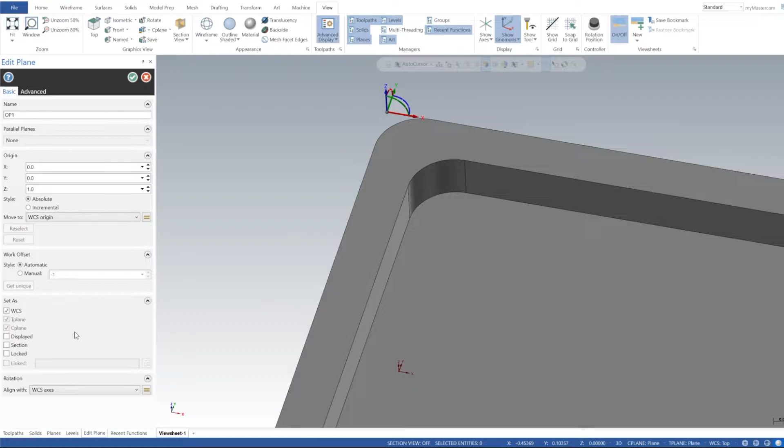I'm going to click OK on that. Actually, let's name it something. I'm going to name this... sorry, I went into Fusion for a second. So this is going to be called Op1. And then I'm also going to turn on work coordinate system in the set as, and then work offset, I'm going to put number 1, and then go ahead and click OK on that.

And then I'm going to right click on the screen, go to isometric, and click fit. And then on our view sheet, I'm going to save this view sheet. Okay, cool. So now let's set up a work coordinate system for the bottom of this part.

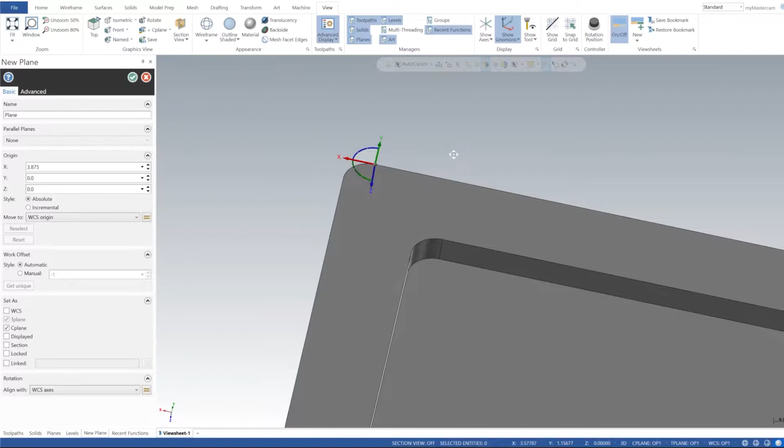So if I flip it over, try to get a good angle here. So that's our op1. Let's pick this corner for our operation 2. I'm going to click dynamic on our planes, then select the same area here, and you'll notice our Z is pointed in the wrong direction. So if you select the inner thingy, you could rotate this over 180.

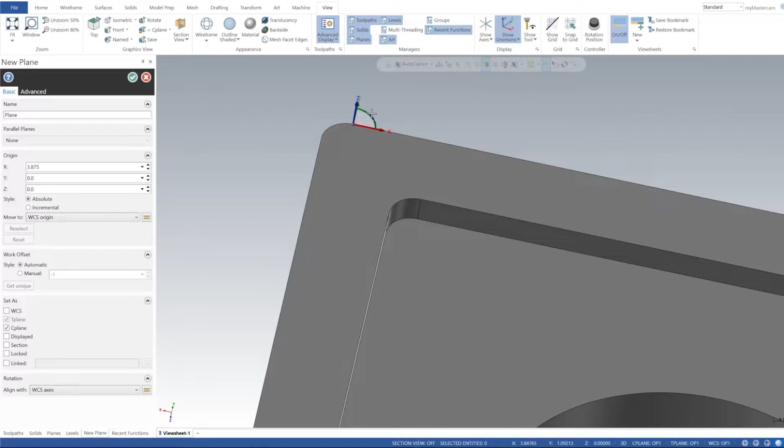Quick tip here: inside this ring, it'll snap in 5-degree increments, and outside the ring, you're free to set the angle that you like. But I'm going to go ahead and set that to 180. And then I'm also going to set the X to this line right here.

Okay, cool. And I'm going to name this Op2, and set that as a work coordinate system. Click OK, then select isometric. Then I'm going to click the plus sign next to our view sheet, right click, view sheet 2, there we go. Save view sheet as bookmark. Another thing is edit, and I'm going to set manual, and set that to work offset number 2.

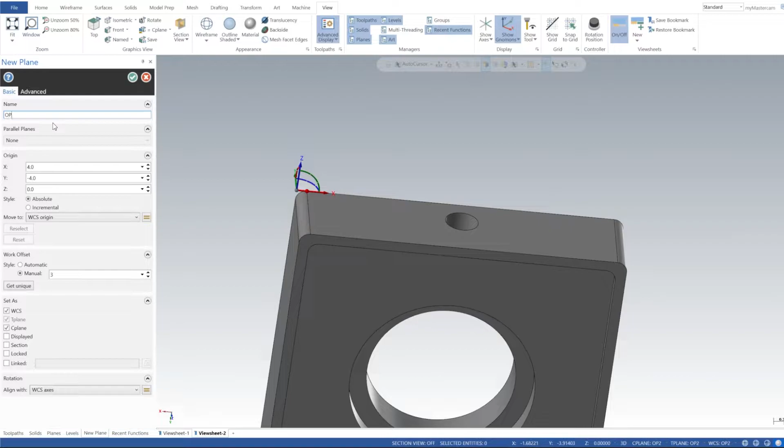Okay, cool. And then the last work coordinate system we need to set up is for the side of the part here. Same thing, plus sign, dynamic. I'm going to snap to this edge here, and then drag the X over. I'm going to set that to number 3 before I forget, and call this Op3. And I'm going to select OK.

And then I'm also just going to right click isometric, click the plus here, and save view sheet. We can rename these as well, just right click and rename. So put op1, rename, op2, rename, op3.

Alright, cool. So now if I click op1, we're in this display here. And you could also notice that it sets your... sorry, I have the auto hide feature on the taskbar. So our C plane is op1, T plane is op1, and our work coordinate system is op1. And if you go to the op2 view sheet, it switches it all over to construction plane 2, tool plane operation 2, and work coordinate system 2, and then it'll also do the same for 3.

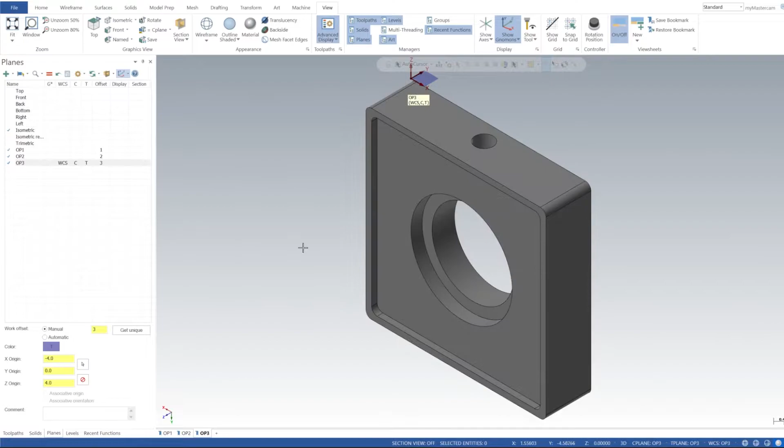So that's a good way of easing your flow when you're programming this part all the way through, because then if I just click this one, we could just program off of all this, right? So let's go to machine, let's go to mill. I'm going to do a default mill. And then let's go to our tool paths.

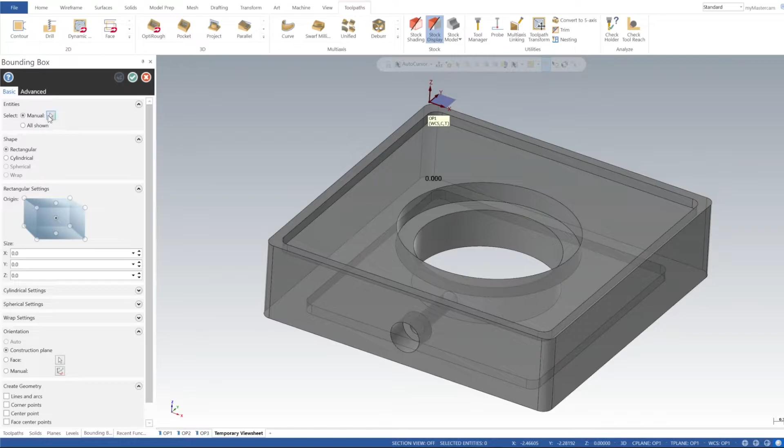So now I'm going to set up our stock. I'm going to select add bounding box, then select the cursor next to manual, select our solid model, and select OK. And we have our auto-generated stock.

Then in our toolpath group, I'm just going to double click this and put op1. And we can go ahead and collapse that.

So in operation 1, we're going to do a face mill, and then we're going to have a 1/2-inch cutter do our contour, our pocket, and also our bores. Then we need to clean up this pocket with a 1/4-inch end mill to get the radiuses, and we'll also put a deburring tool.

So we can go ahead and go to our tool manager and set that all up. If we right click, we can create a tool. I want to start with the facing mill. I'm going to put 1.9 by 2, and then I'm also going to put a corner radius of a 1/16.

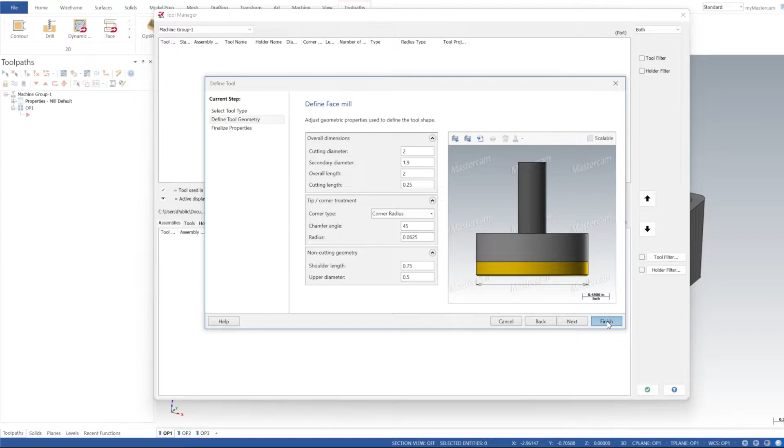That's fine. Let's go back into that and edit the tool. If we go into finalize properties, we could have it just do our feeds and speeds for us, so we don't have to adjust it in the actual toolpath when we grab the tool. It'll just always be that.

We'll just put 6 flute face mill or something. For the feed rate, let's go ahead and put 60, and then our spindle speed we'll just move this at 4 grand. We'll just go ahead and leave all the labels the same here. And I'll click finish on that.

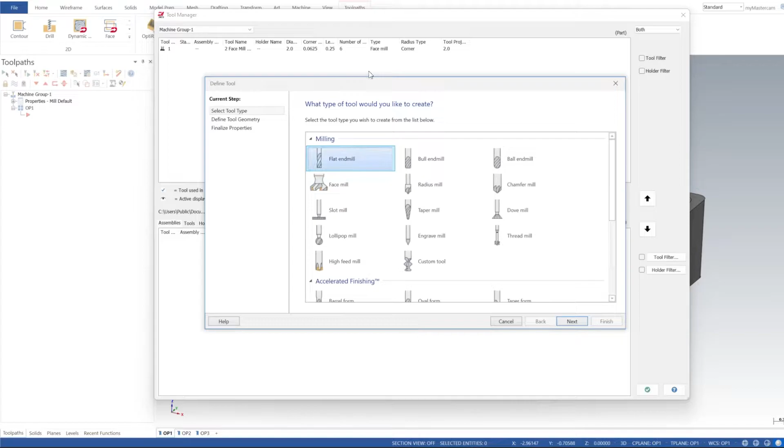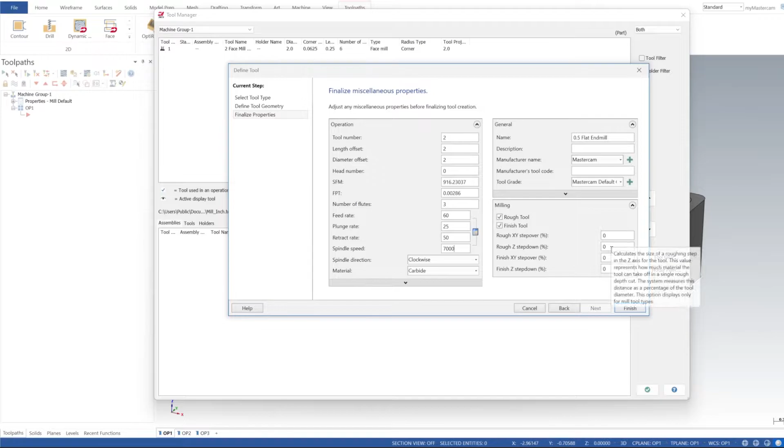Right click, let's create another tool. We'll do our 1/2-inch end mill, and we'll say it's a 3 fluter. For our feed rate, I'm just going to put 60 and 7 grand. You could also populate these fields too, but we'll go ahead and just do those in the toolpath.

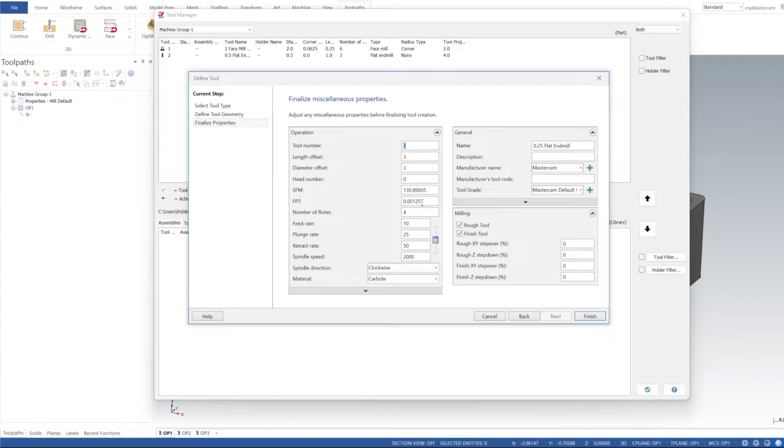Right click, we're going to create a tool. We're going to create our 1/4-inch end mill now. We'll just type in 250, finalize properties, and we could enter what we want. We'll spin this at 10 grand and we'll go 40 on the feed. And that'll also be a 3 fluter. Click finish, and then create tool.

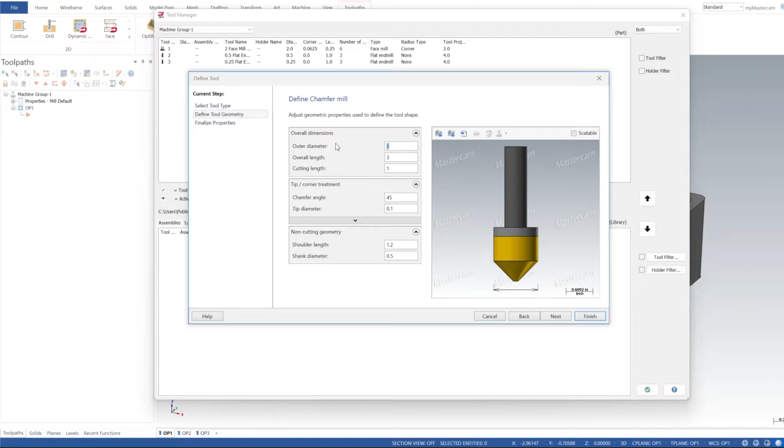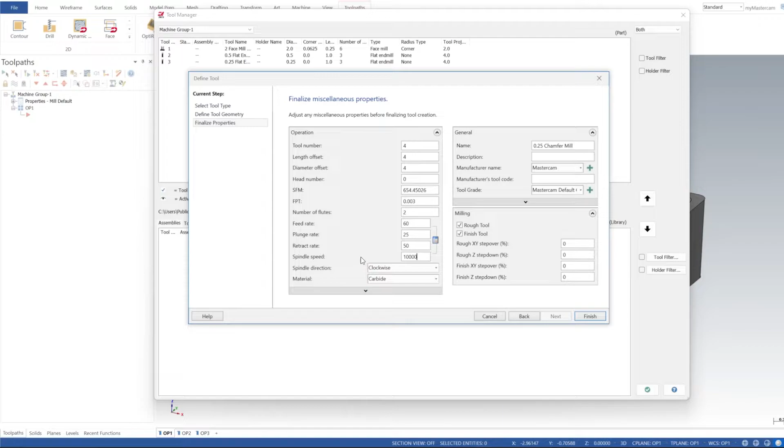And we're going to create a chamfer mill. We'll just say we have a 1/4-inch chamfer mill. Our diameter, oops, not 25 inches, 0.250 inches. And we'll say our tip is 30 thou. Finalize properties, and we'll just say this is a 2 flute chamfer mill, and we'll go ahead and put in our feed rate. We'll just do 60 at 10 grand. And we'll click finish on that.

And then the other features on the side, we have a 201 drill, number 7 drill, and we're gonna do a tapping cycle on that as well. So we'll go ahead and create those tools.

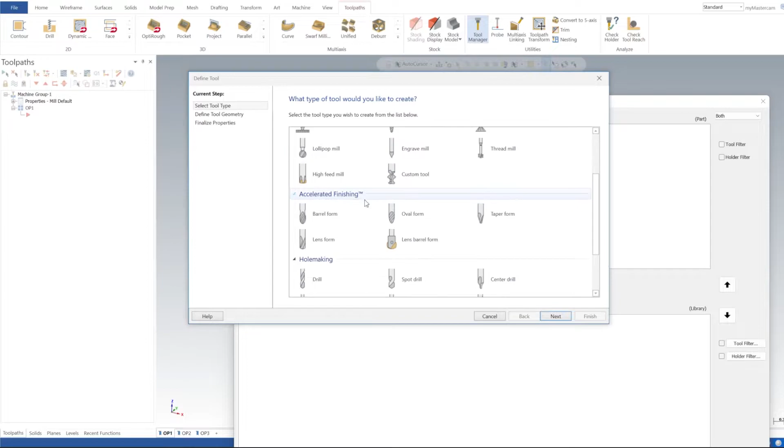So let's go ahead and drill. We're gonna set this as 0.201, and finalize properties. We'll just do some conservative numbers here. We'll do a feed rate of 20 and spindle speed of 2 grand. So I'll click finish on that and then create tool.

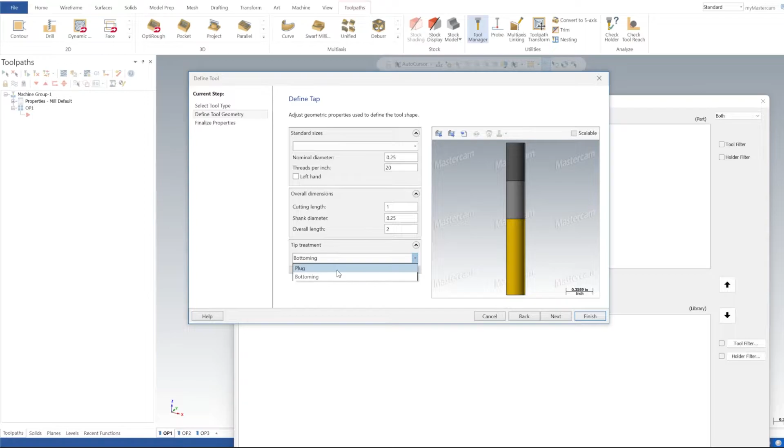And we're gonna create our tap. So I think the standard tap it gives you is a quarter 20. So our nominal diameter is 250, threads per inch is 20, and I'm going to set that as a plug tap. 1,000 by 50 feed rate is fine for this. Let's see, the pitch is 50 thou, so feed per tooth is 50 thou. Perfect.

And tap cycle, we'll just set that to rigid tapping.

So now we have a tool library for this, and you could actually save these and bring them up for different parts that you're going to program. So say you have a tool list and it's already in the machine, you could just call this back up and just keep reusing these tools. So we have our tool manager set, and I'm going to go ahead and close that.

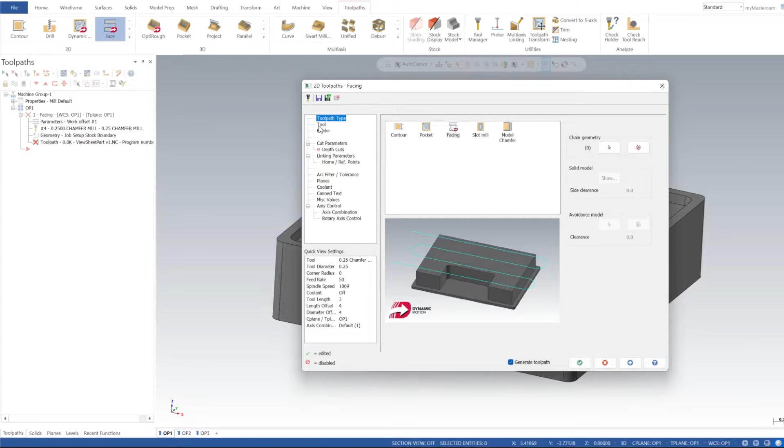So let's do a face. I'm not going to select anything, we're going to go off the stock. And then so this is going to be tool 1, and then you can see it auto-populated our feed and spindle speed. Linking parameters.

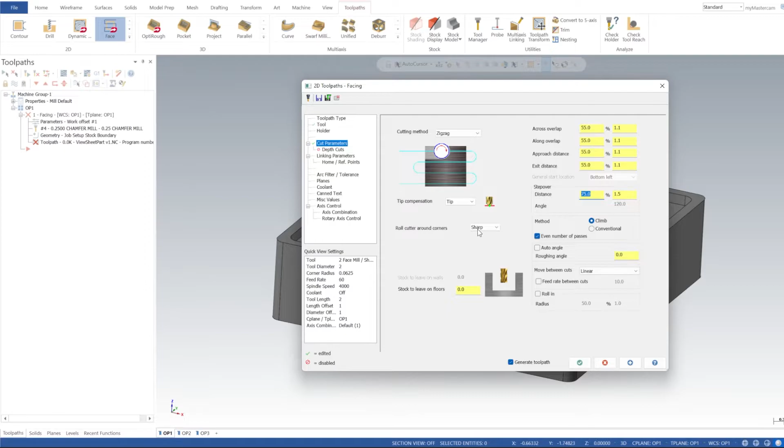Well, let's go to cut parameters. I want that to be zigzag, and I don't want any stock left on the floor. I'm just going to set all these to 55%. And then step over 75% is fine. Shouldn't be taking too much material off.

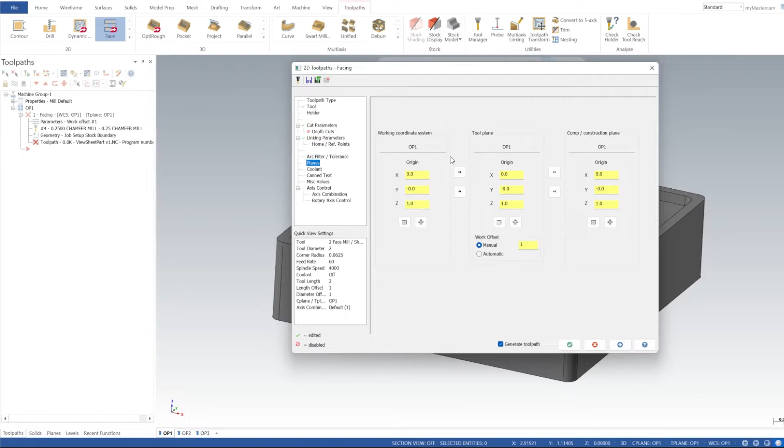I'm going to go back to linking parameters and set this all to absolute. For depth, just click the top. It should be 0, right? For planes, you can see it auto-populated our WCS, tool plane, and construction plane to op1, which is what we're working on. So I'll click apply and OK.

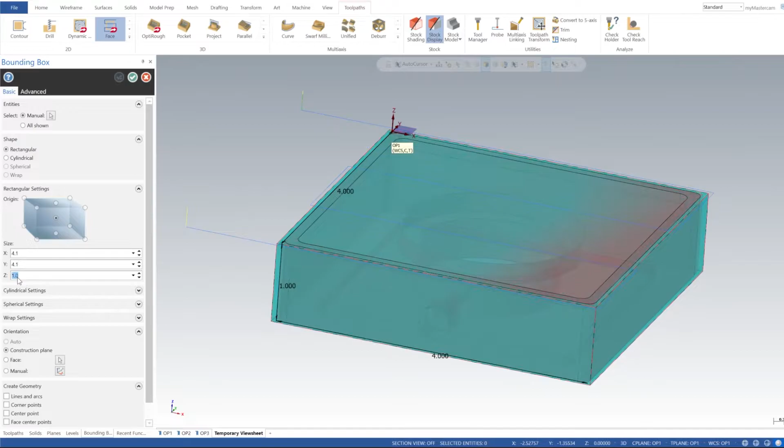And just for demonstration, I'm going to go back to the stock, and I'm just going to add 100 thou to our dimensions here so we could see it actually machine. Alright, and then I'll just click regenerate on that.

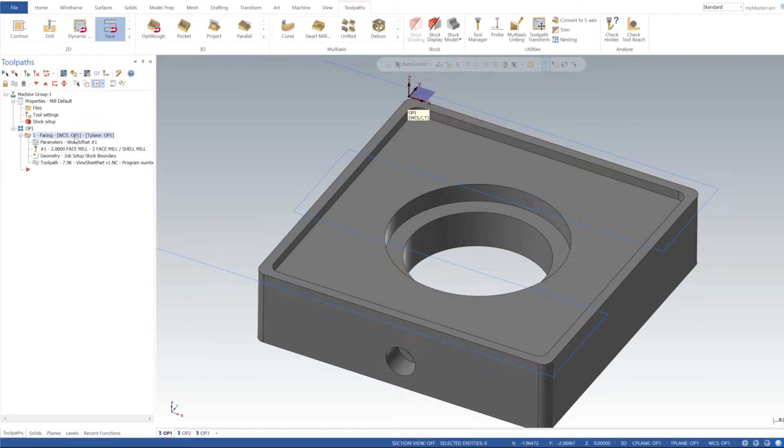Alright, cool. So next thing we're going to bring out is our 1/2 inch end mill, and just do a contour, then pocket and circle mill. So let's go ahead and do a contour.

I want to highlight that bottom contour there, just so it gets our depth. I'm going to click OK. Tool, it's going to be tool number 2. And see, it's pretty cool — it generated our feed and speed for us.

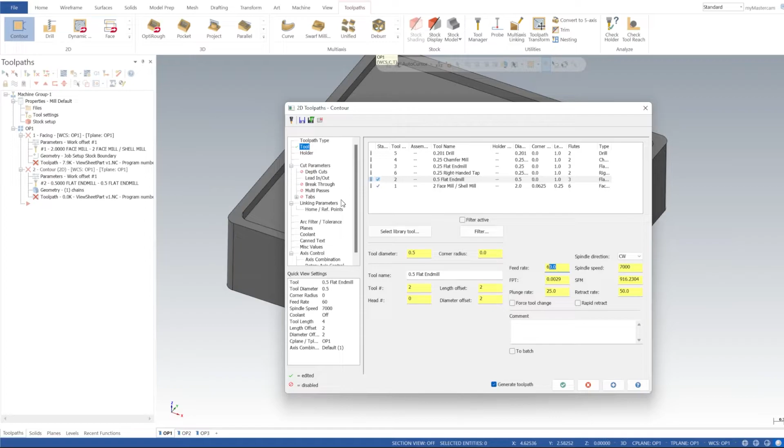Then cut parameters, I always like to use wear. Compensate to the left, sharp, yeah. And we don't need to edge break this because it already has radiuses on the geometry. Lead in, lead out, that's a bit extreme. I'll just go ahead and put 25%, 55%, 90-degree sweep, and put that to our exit as well.

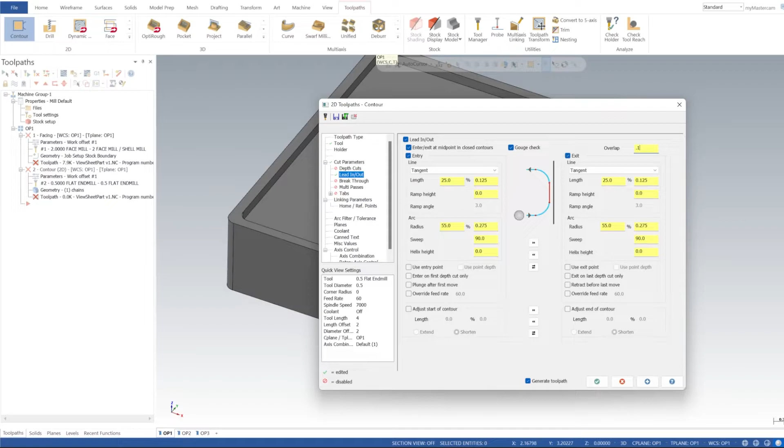And enter exit at midpoint in closed contours is good. We'll do 100 thou step over. And then for our linking parameters, I'm just going to set this all to absolute, and for depth it already picked up our -1 inch. So click apply, click OK. We can see we have our contour here.

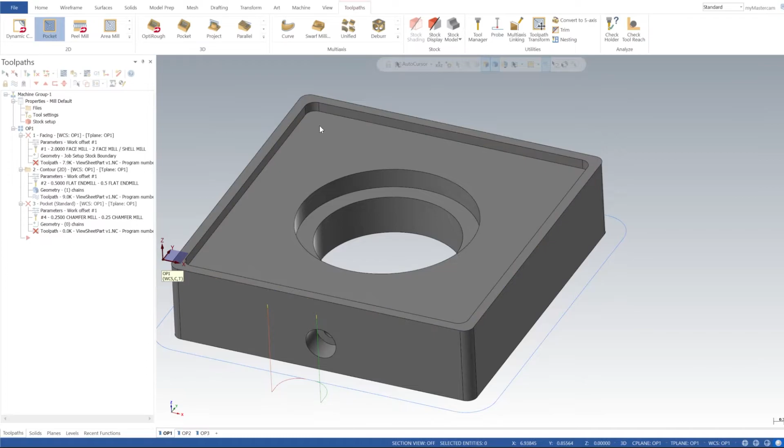And then we'll just go ahead and do a pocket tool path. We'll select the inside pocket here. I'm going to select OK. Tool, I'm going to go ahead and select our 1/2 inch end mill once again. We'll go right to cut parameters, and for the walls we'll go ahead and leave a little bit for our 1/4 inch to come in and clean up, since we got to hit those radiuses anyways.

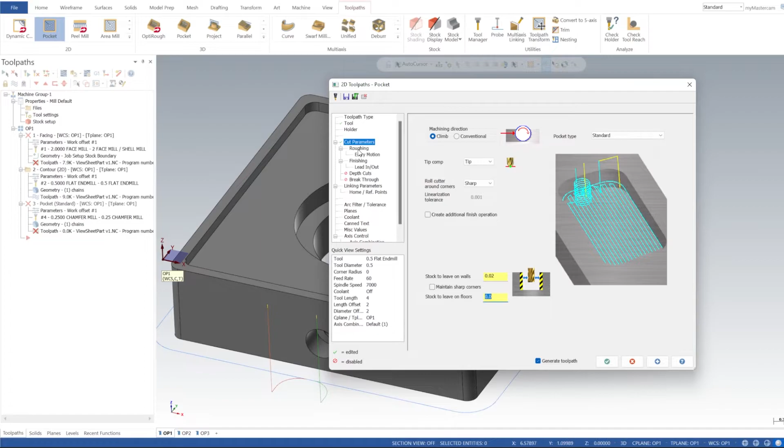And stock to leave on floor we'll leave at that 0. For roughing, we'll just go ahead and leave it at zigzag. 50% step over is fine. It's not that deep. We'll helix in, just let it do its standard helix in here. And then for our finish, we don't need a finish.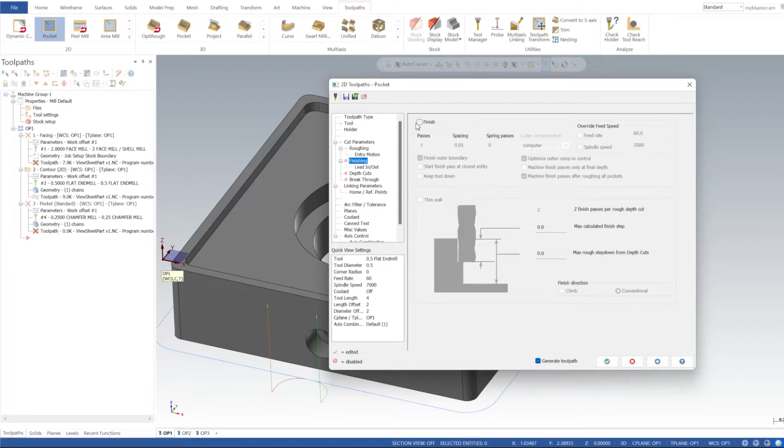We're going to finish up with our 1/4 inch, so lead in and lead out's also turned off. And then I'm just going to set all this to absolute. Depth is not -100, it is -1/8 of an inch. Click apply and click OK.

So we can see it's going to spiral over, spiral down, and then just zigzag back and forth in that pocket.

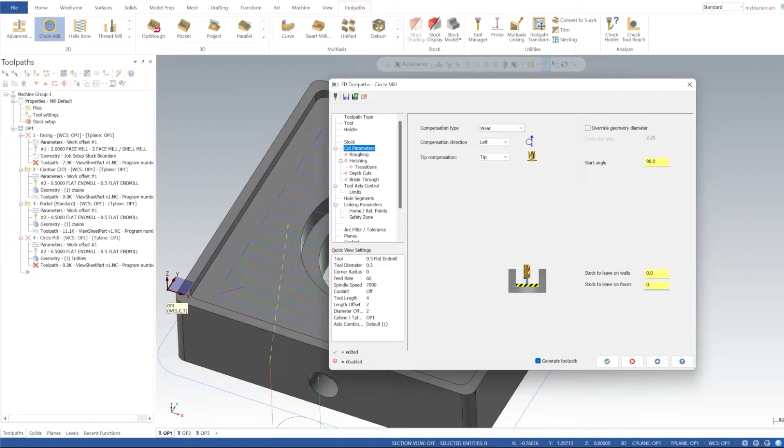And then the next thing we need to do is our circle mill. I'm going to do this big bore first. Tool, 1/2 inch. Cutting parameters, we're going to turn on wear, and 0 to leave on walls and floor. And then for roughing, we're going to turn that on. We'll leave a 50% step over, and then helix entry we'll just leave it at the standard values.

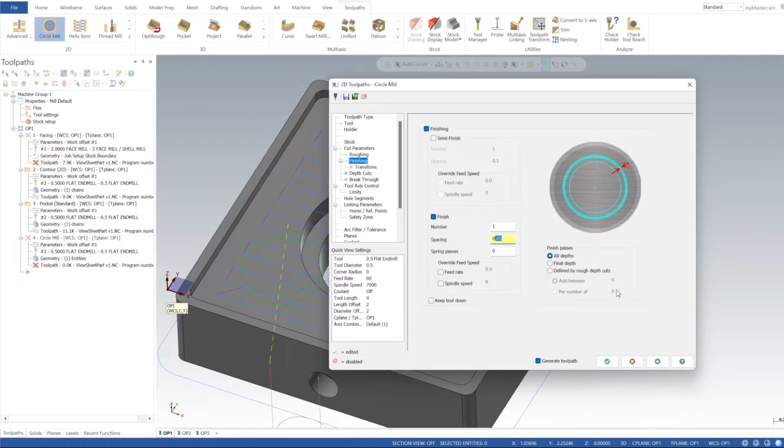And then we're going to turn on our finishing. We want 1 finish pass, and spacing of 50 thou is fine. And we'll just do our finish pass at the final depth.

And linking, I'm going to set all these to absolute. And then for our depth, I'm going to select the bottom of our bore there, which is 3/8. So let's go ahead and click OK on that.

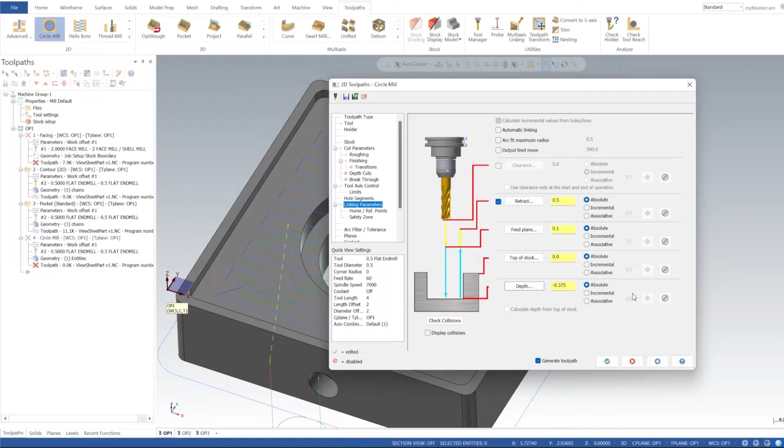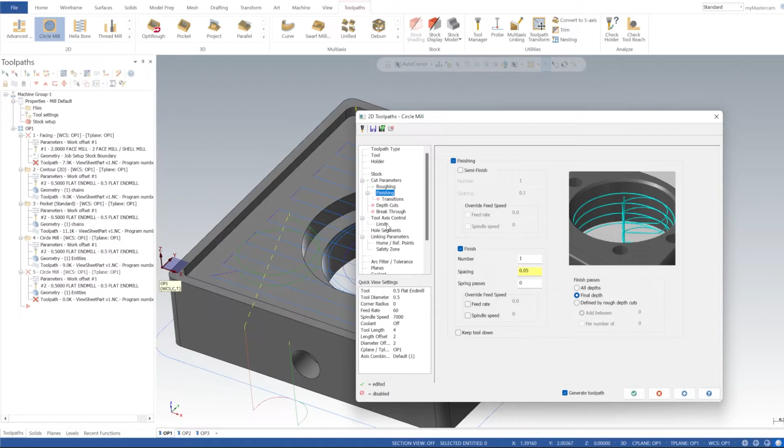So we can see we got most of this programmed already. And then I'm also going to circle mill once again the inside bore. So let's go ahead and go in there, select our 1/2 inch tool, cut parameters, wear should be the same, and then all of our values should be the same from the last time we did this, but it's always good to check.

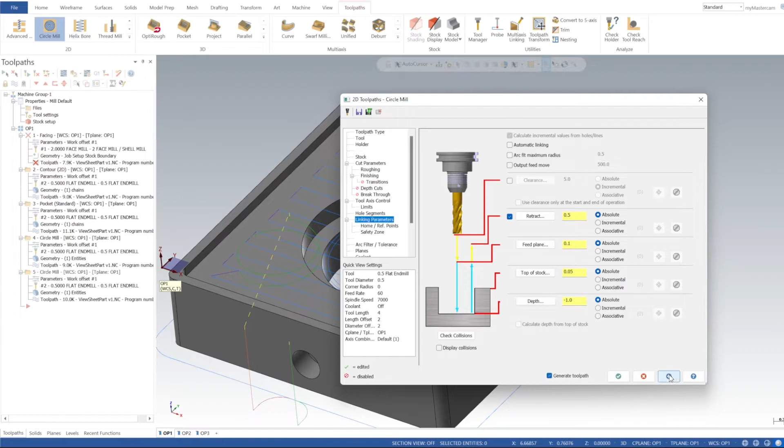And we'll just go ahead and go down 1 inch, just so it's going to show up on the back side, and we don't have to worry about any material being left over and milling over like 10 thou of material. It's pretty noisy, so we'll just make sure it kind of breaks through that. So I'm going to click OK on that and click apply, and we'll just generate that tool.

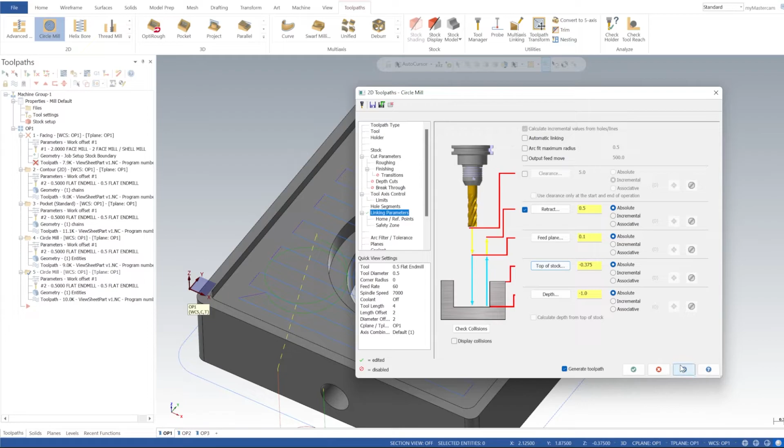One thing we need to do is select our top of stock, the floor of our wider diameter bore, just so it doesn't helix down so much. You could just get right into it.

Last thing we need to do is go back and do our contour, and I want it to go the other way. Our tool is going to be number 3, our 1/4 inch end mill.

These values should be fine, where all these values are good. Same lead in, lead out's fine. For linking parameters, top of stock is just going to be 0 there. Feed plane, we'll just set that to 100 thou. Select OK.

I really don't like where it started there, so I'm going to go to chain and edit this. I'm just going to select the dynamic feature and select the end, kind of in the middle of that geometry, and then regenerate that. Now we can see it's going to enter and exit in the center of this. Perfect, all right.

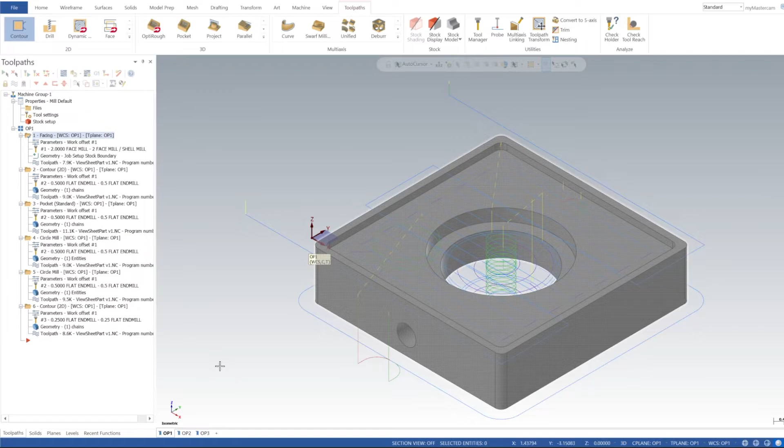Also, we need to regenerate our face mill there. So if I go to isometric again and right click fit, and go to op1 and say view sheet, and then hide all of these, it should come back with those on. No, maybe not. Maybe they changed that in 2023. I'm not sure, all right.

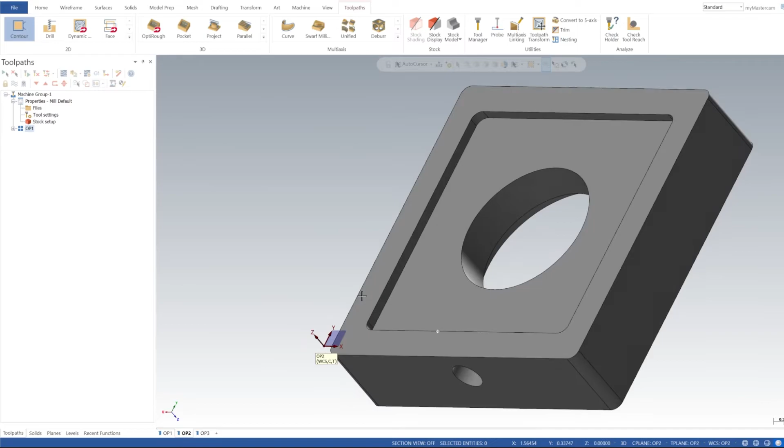So we have op1 programmed. Let's select our op2 view sheet. This actually is not a good location for our work coordinate system, so let's just go back into planes, right click edit, and I'm just going to take this and snap it up here.

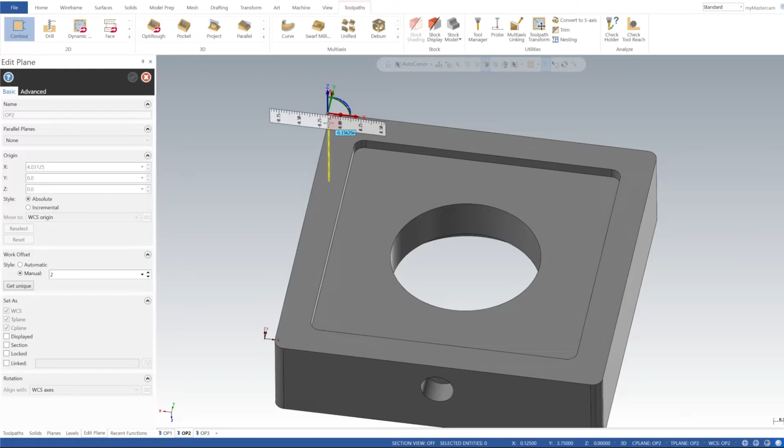And then for our X, drag that over to the edge. That still doesn't look right. There it is, all right, cool. And then I'm going to select OK on that. Right click, isometric. There we go.

That's much better. I'm kind of doing this on the fly, guys, so I might miss things here and there, but I'm just trying to give you the gist of it. And then when we go through verify, we're going to make sure everything's cozy and we don't get any plunges or weird toolpaths.

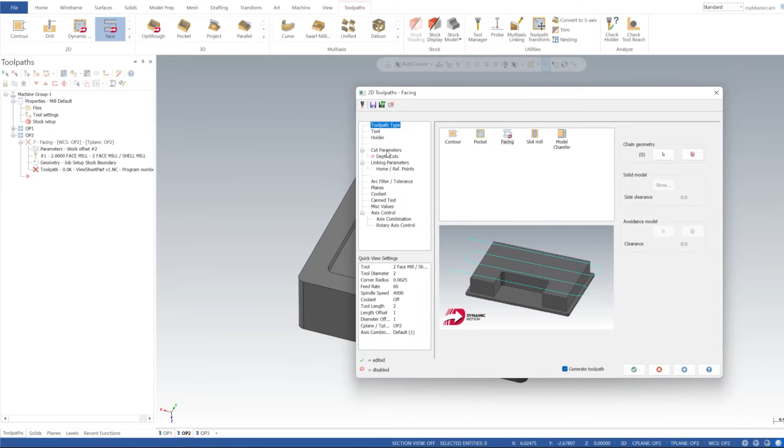So back in our toolpaths tab, we're going to right click here, and then groups, new toolpath group. We're going to name this one op2, and for this we're also going to do a face mill. Select OK on that, and it should have all the same parameters as last time we did this.

So depth is 0, right? Okay, let's select OK, and now we have that. We already did our contour and we did our bore, so all we need to do is this pocket now. So let's go down, select pocket, select that inside contour of the pocket.

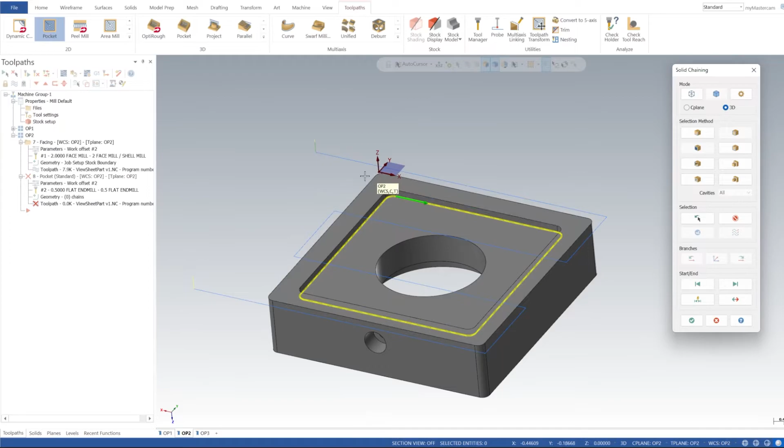Tool, we're going to do our 1/2 inch end mill, and all this should be the same as last time we did it. And depth is, yeah, 1/8 of an inch. Okay.

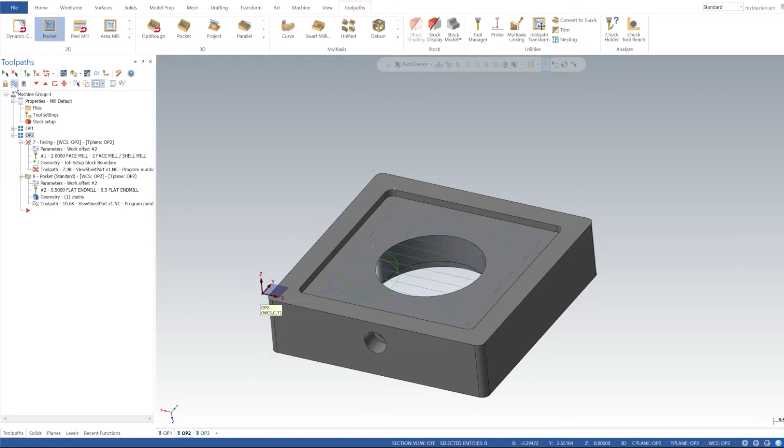Did I miss anything in this? I don't know, let's go back to parameters real quick. Top of stock is going to be 0. Yeah, all right, there we go. And then same thing, we're going to select our contour.

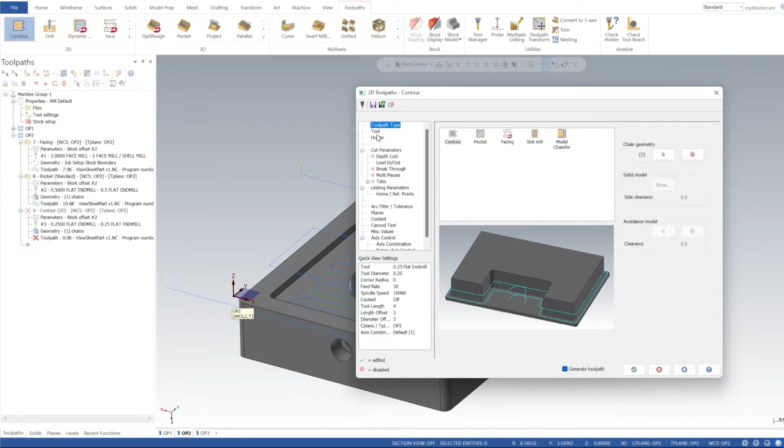And then I'm going to reverse it and just go to our dynamic, just put it in the center there real quick. Tool is a 1/4 inch. Lead in, lead out, it's all the same as last time we did this, and our link parameters, depth should be the same. Yeah, and our top of stock is up there. Yeah, okay.

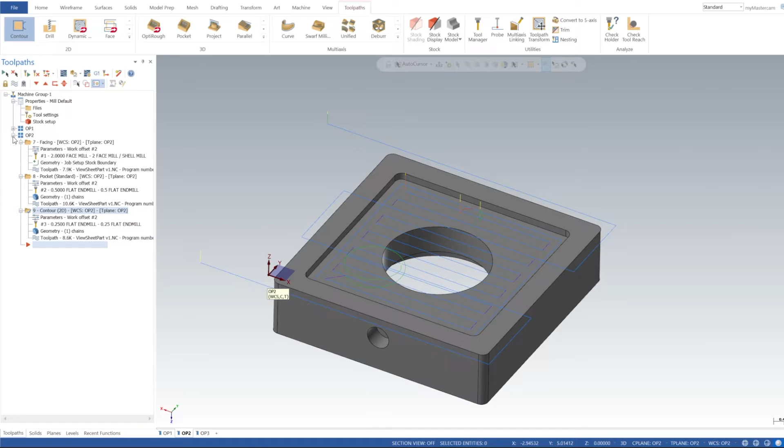So now we have the top and bottom programmed. One thing I did forget to do is our chamfer mill, but we'll just skip that in this lesson. I think I included that in our 2D contour video, so if you want to learn how to do 2D chamfer milling, you could watch that. But we'll skip that for now.

This is just kind of a demonstration of the power of ViewSheets and setting up your custom work coordinate systems.

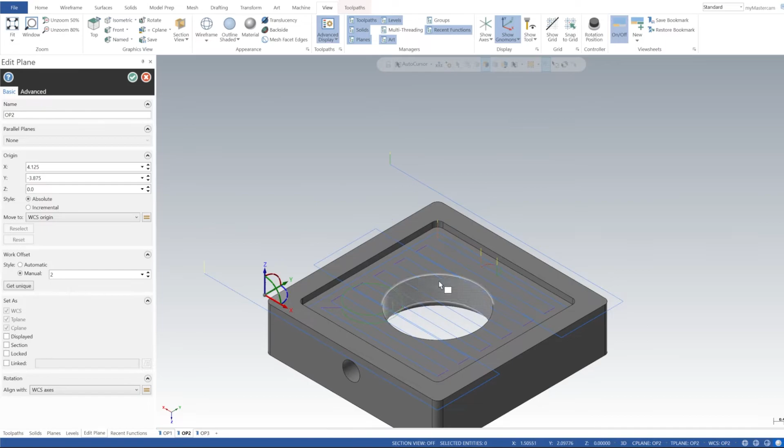You know, it doesn't look like it saved our location on this, did it? I'm going to go ahead and edit that again. It's going to make us regenerate this, but I'm not sure why it's not saving. Alright, got that.

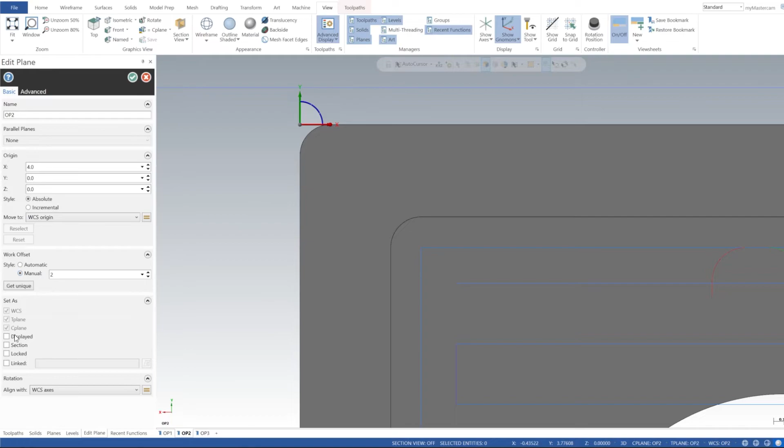So we're good there. That's where it should be, right? Save our view sheet again. Toolpaths, it's going to want to regenerate these because they're all based off a new work coordinate system, right? Okay, so we got op2 programmed and op1.

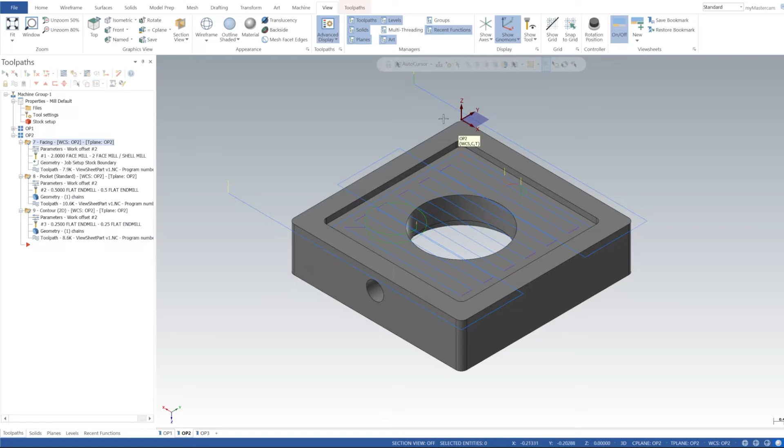Op2 is good. Now our op1 looks off. This is all op1.

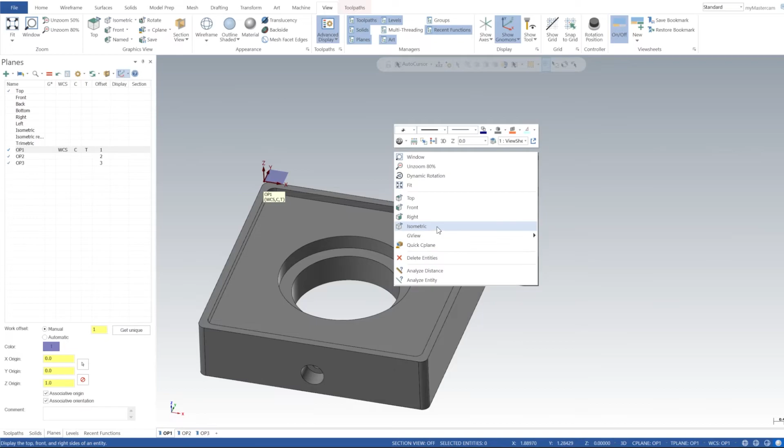So let's go back to our toolpaths and I'm just going to select this, generate. So we're good there, and just going to save the view sheet again.

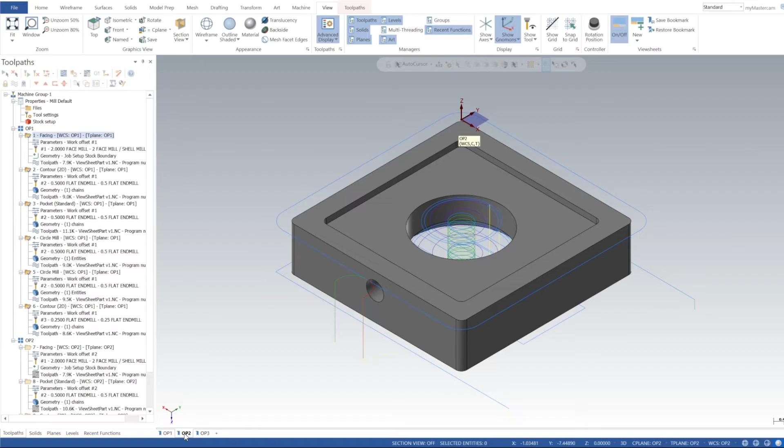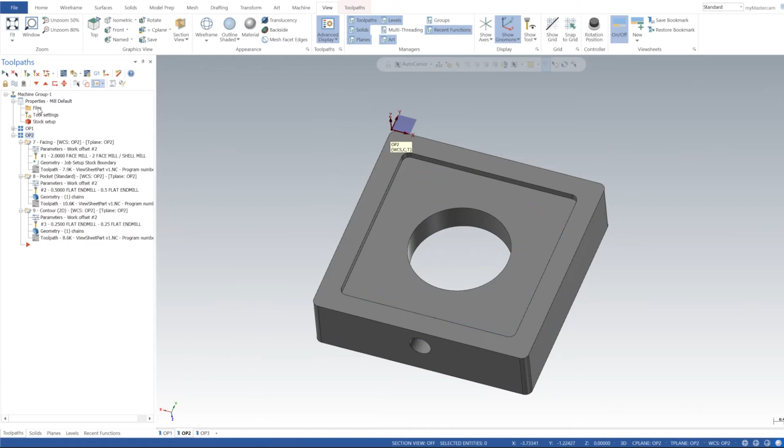So if I hide all that, collapse that, and then turn on these. I guess I must have set up our work coordinate system wrong the first time, but hopefully you made it this far in the video and learned from my mistakes. Kind of interesting.

This looks right. Okay, let's right click and do our groups, new toolpath group, and we're going to call this op3. All we do is drill, tap, and then we're going to counterbore this.

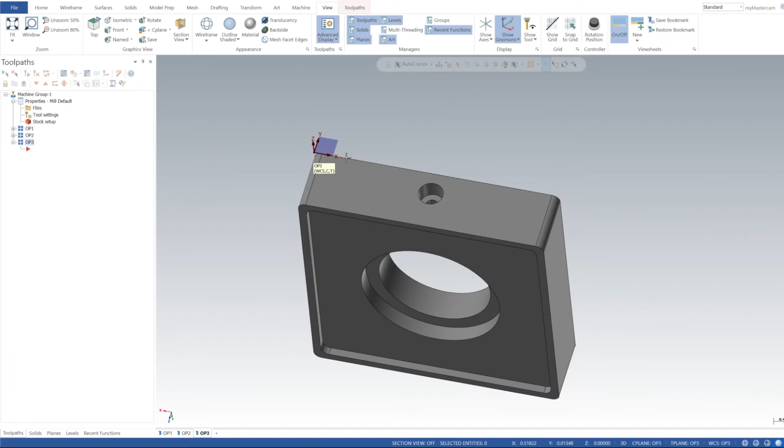So let's go back to our toolpaths, and I'm just going to select the circle. I know it's big, but it's not a big deal.

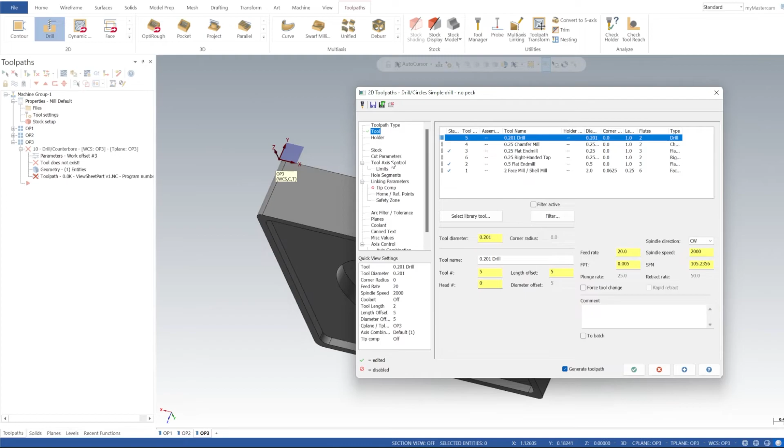And we're going to go to tool number 5. We have our settings here, and cut parameters. We're just going to go straight through with the drill.

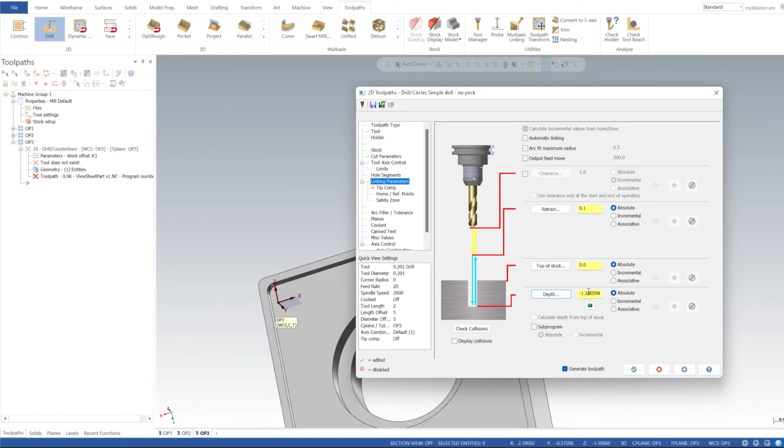G81, basically. And if we go to our linking parameters, I'm going to set these to absolute. Retract, it's 100 thou. Our depth, I'm going to select the bottom of this, and let's do a tip comp, and I want it to punch through 100 thou.

And I'm going to click OK on that. So we got that toolpath. And then we're also going to do another drill cycle, but we're just going to do the tap this time.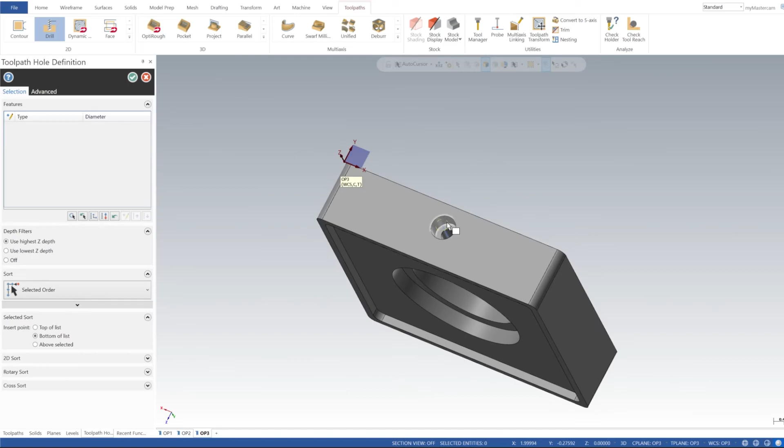Tool, we're going to do our quarter 20 right hand tap. I'm going to select rigid tapping cycle for that. And then for depth, we're also going to do this.

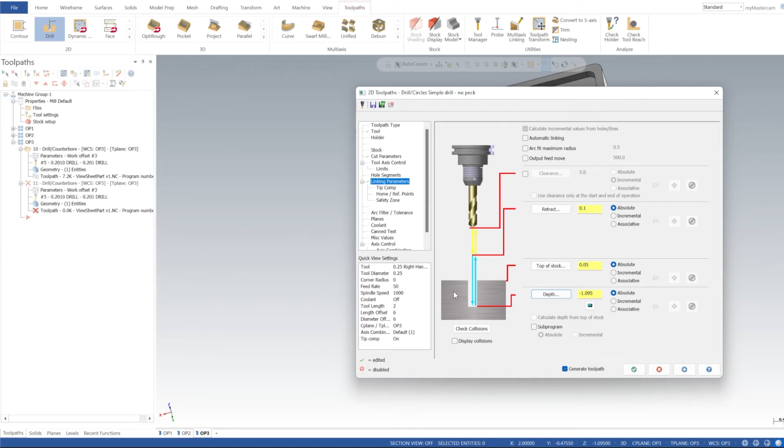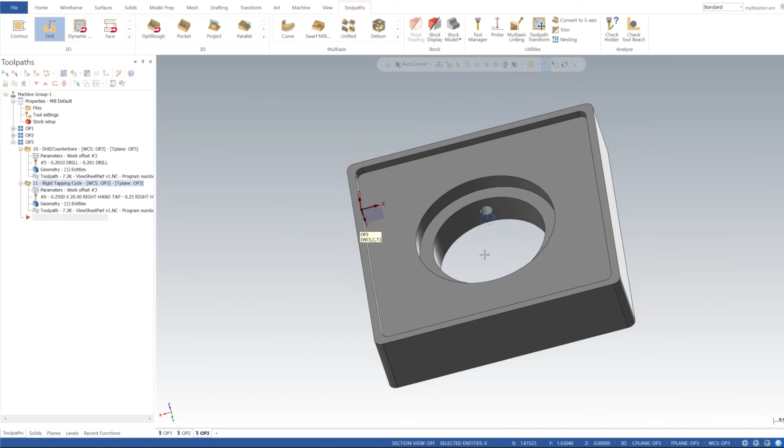It's 1 inch, and we have our tool compensation here. I'm just going to put an 1/8 inch. Sometimes the leads on the taps are pretty long in length, so I want to make sure we get past that lead so it's an actual thread all the way through. So depends on your tap, but we'll just do it like that.

And then for this counterbore, we're just going to do - where is it? - a helix bore. And I'm just going to select the bottom of that counterbore.

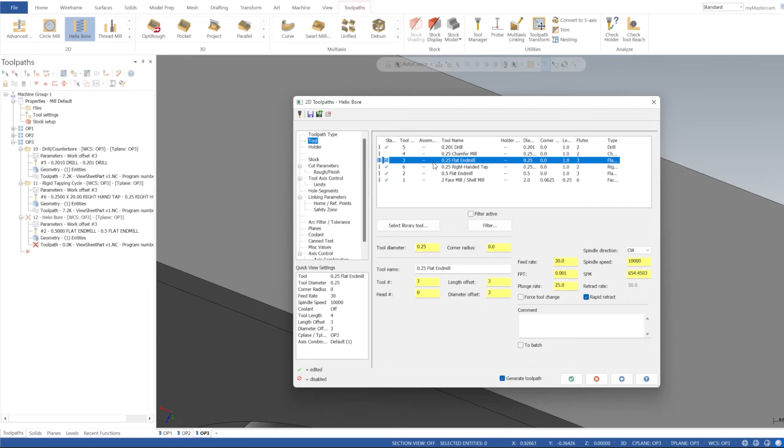And for a tool, we're just going to use our 1/4 inch end mill. I'm going to turn on wear, and we're going to do 0, 0. And roughing, finishing. For a pitch, I'm going to put 40 thou.

Feed rate at bottom, not 1,000, but 100%. And we'll just finish it upwardly. And we'll set the feed rate and spindle speed to 100%. So I'll just go in and back out.

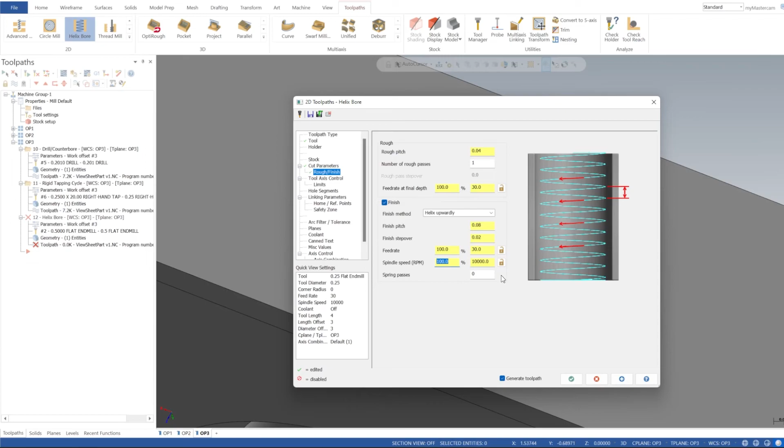And for this retract, we'll just do 100. And I'm going to set all these to absolutes. Depth is... where is it?

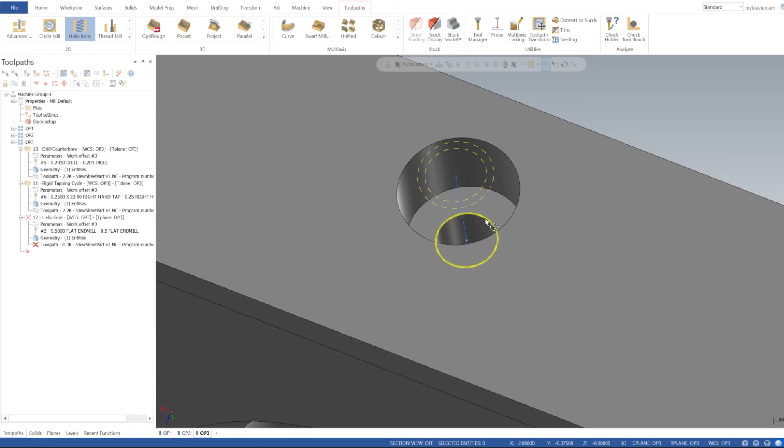Having trouble selecting geometry today. So we'll go ahead and leave it like that. It's negative 300. And we'll click OK.

And then we can see we have our helix mill in and out. It looks a little funky, right? But it's just a helix in and then a helix out.

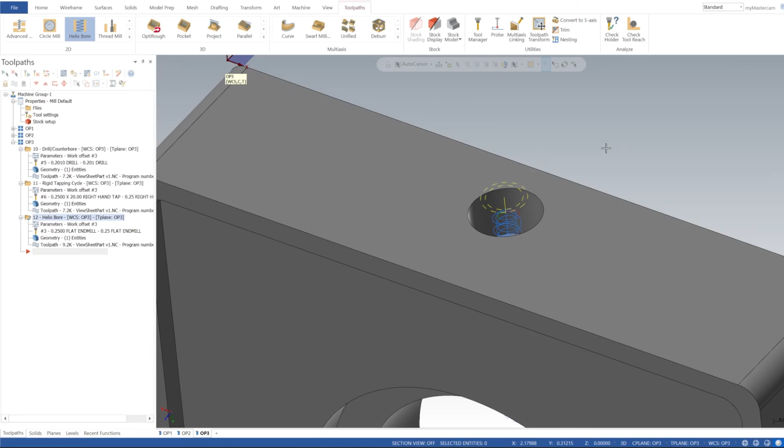So I'm going to go ahead and select our machine group and hide all our toolpaths. And then if I go to operation 1, isometric, op 2, looks like our work coordinate systems are in the right place this time, and they kind of stayed there. I'm not too sure what happened with that, but let's go ahead and do a verify.

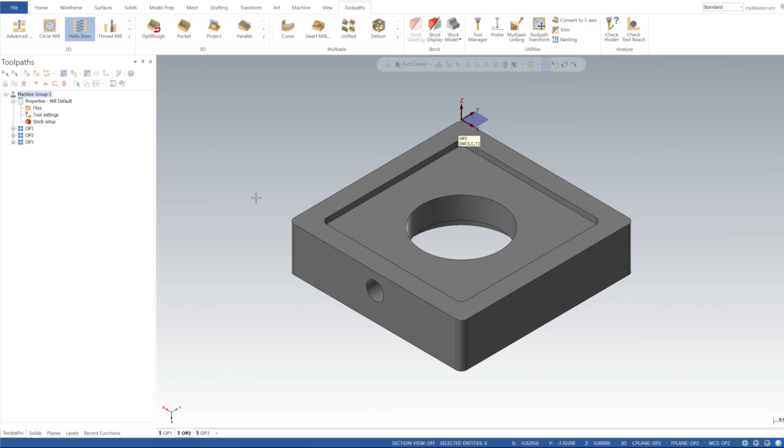And we should see the tools hit from 3 different angles. Make sure your tool plane's also aligned with your work coordinate system, because if it's not, it's going to assume you're using multi-axis and try to rotate on an A, B, or C to get those tool hits. So just make sure your work coordinate system is matched up with your tool plane and construction plane.

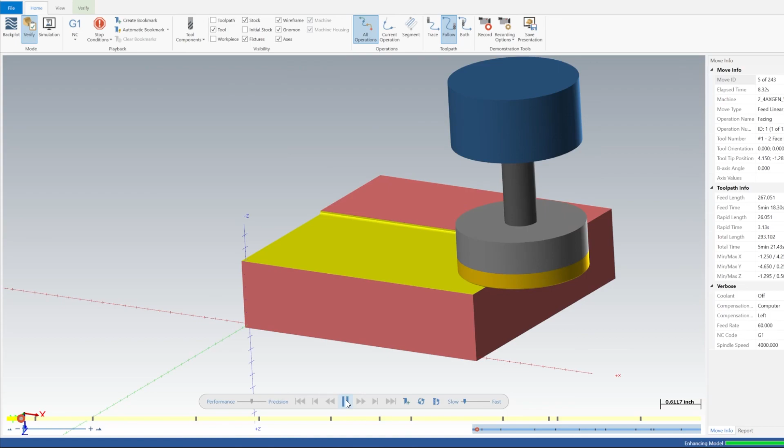So we have our plane, contour, our pocket, our circle milling, and then side. And we're doing the back side of the part here.

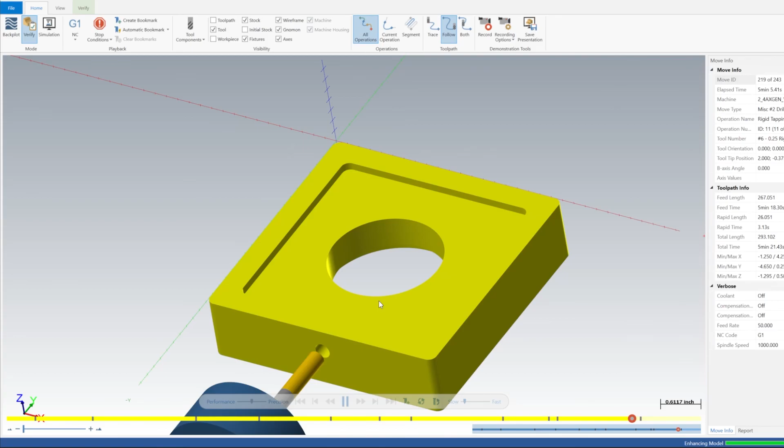Drill, tap, and counterbore. Cool. Well, hopefully you made it this far in the video and you learned a bit about ViewSheets and custom work coordinate systems. I'm going to go ahead and try to get another video out over the weekend so you can learn a little bit more on Mastercam. So, all right, thanks for watching.